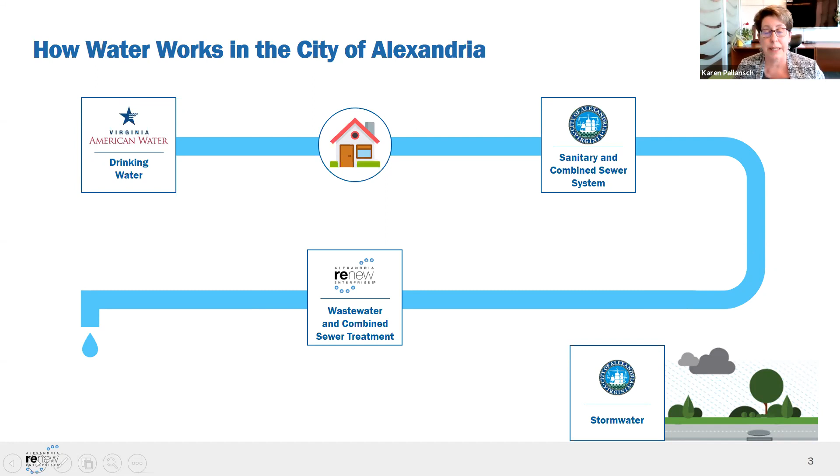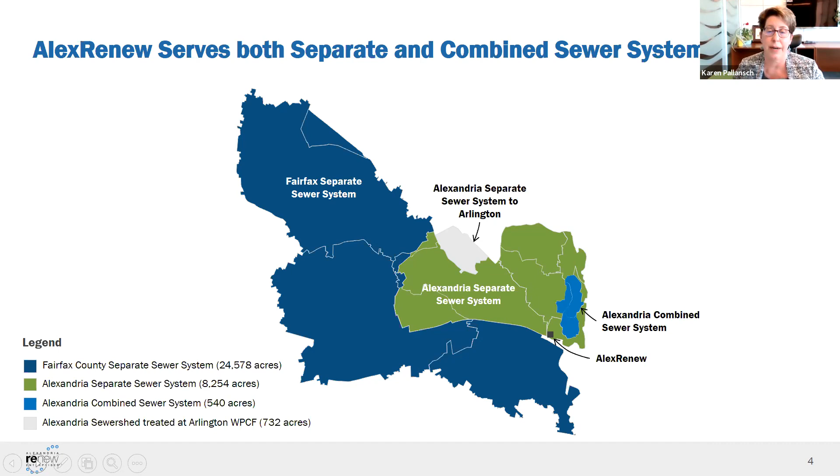I think we get really confused because we have a combined system that exists in the city of Alexandria.

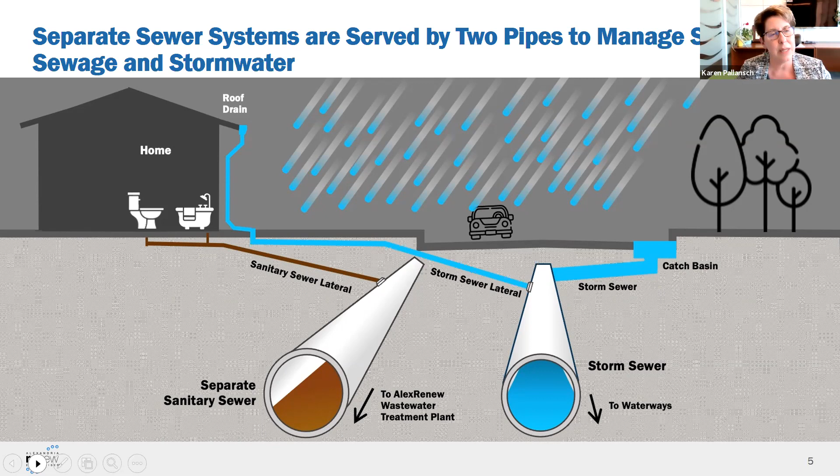And again, our permits only allow us to have the separate sanitary sewer going forward.

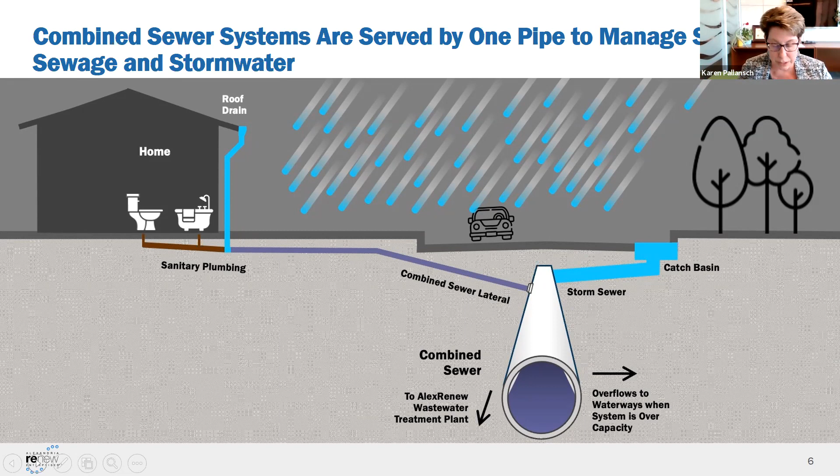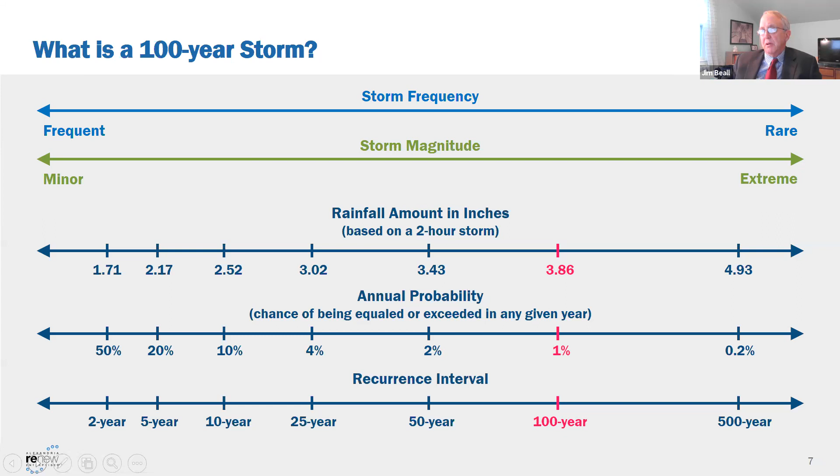And by the way, these curves are unique to this geographic area, right? I am not sure on that one, I would have to find out and get back to you. But yes, my understanding is they are - they're called intensity, duration, frequency curves, and they're different for every geographic place because rainfall is different. It is, yes.

Yes, 100%, excellent, very good. No, and thank you. When they showed me the graph, I said, oh, we can't show that. I can't even understand that, and I have to speak to it. So thanks to Mr. Carl and his team for acquiescing to my request to try to make this so I could understand it, because it's a challenging concept.

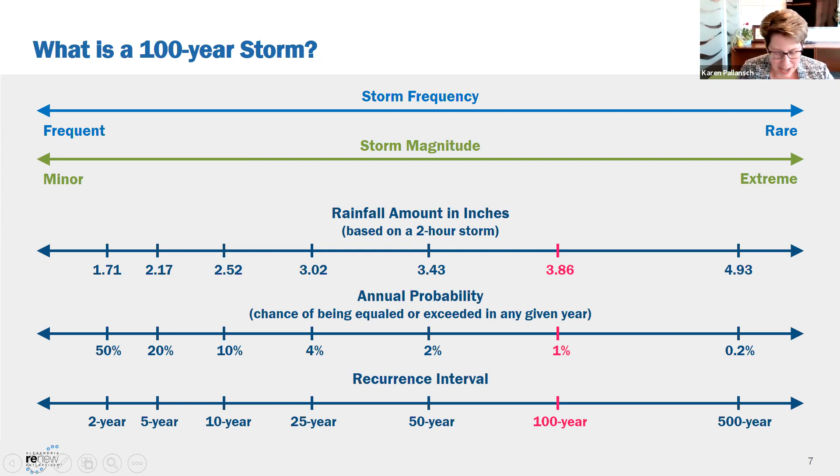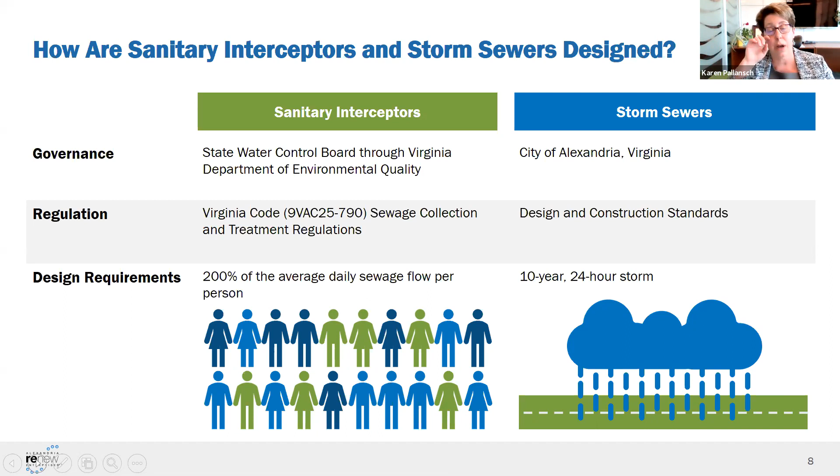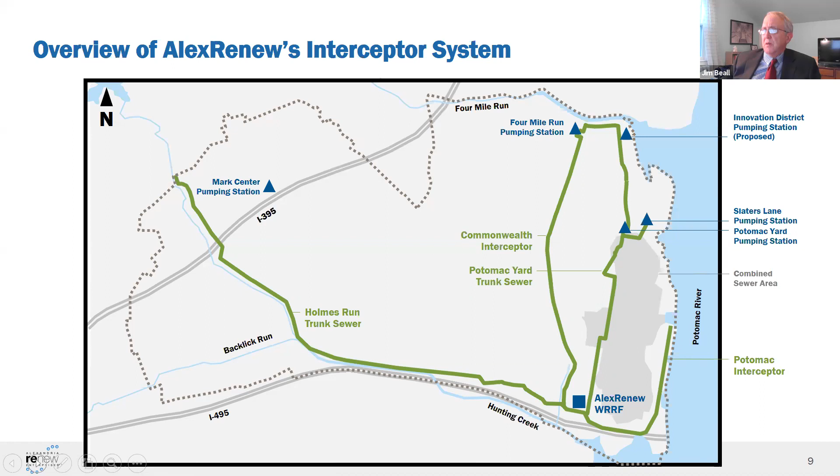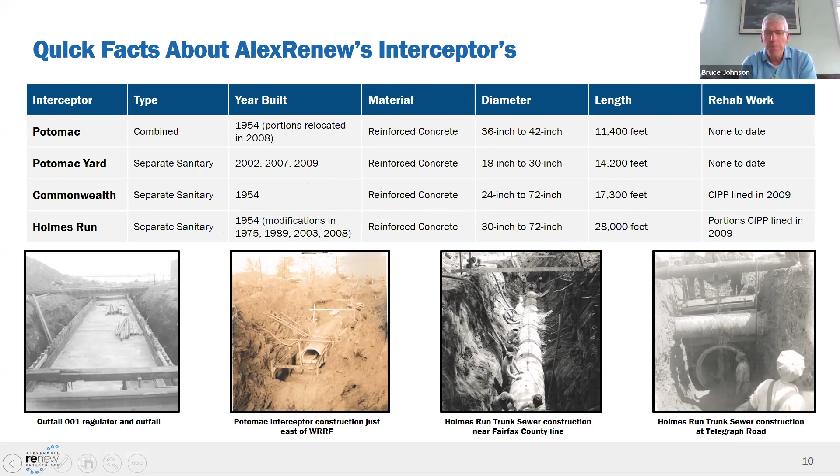Sorry, I missed the beginning of your question. Are pump stations designed to pump the water up over a ridge line, and then gravity flow takes it down to the plant? It's a ridge line, or there could be an obstacle—like the Potomac Yard pump station, which I believe we had to build because of the metro and the train there; we had to get the water up and under that and past it. So sometimes there are just obstacles that we have to move the water around.

Okay, I'll move on, and if there's continued questions, I'll take them.

This is really just an overview in more detail of what I just went through on the map slide. So remember, we have the 4 interceptors, but the Potomac is the one that is combined, skirting right at the Potomac River in Old Town. You can see it was one of the original ones. We've had to move pieces of it when they built the Woodrow Wilson Bridge—we relocated an entire section of that interceptor.

It gives you the materials, and there I did misspeak—it's 18 inches to 30 inches. I forgot about the Potomac Yard being smaller. But you can see the variety of sizes as those pipes go in and gradually increase.

Potomac Yard is the relatively new one, installed when they were starting to develop Potomac Yard. Commonwealth and Holmes Run are aged, along with the Potomac—they were built when the plant was originally built. Holmes Run had a lot of modifications because the metro went in, and a lot of development in the lower Eisenhower Valley caused a lot of relocations as well.

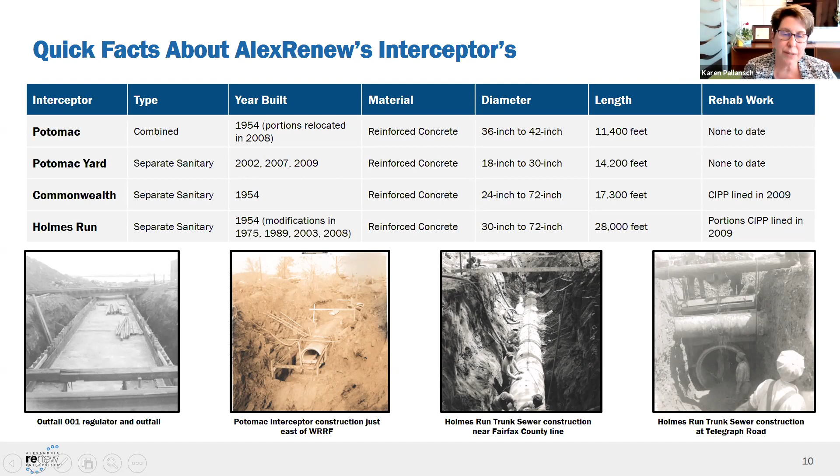There was a question, moving on to the next slide, about how do you know what your flows are? What do you do to measure that and make sure that they're running the way that they need to? Because of the agreements in place for monitoring, for the pump station and our existing operations, and especially for RiverRenew design, we've been working for many years to capture the data needed to know the flows.

On the left-hand side, you can see we have what we call mag meters, magnetic flow meters. They measure our pump station flows, what's going in and out of those pump stations. We have those located on all of our pump stations with feedback to the facility so we can monitor them. The other two are used pretty much together, and you can see how they're used in that schematic of the manhole and the interceptor over on the right-hand side.

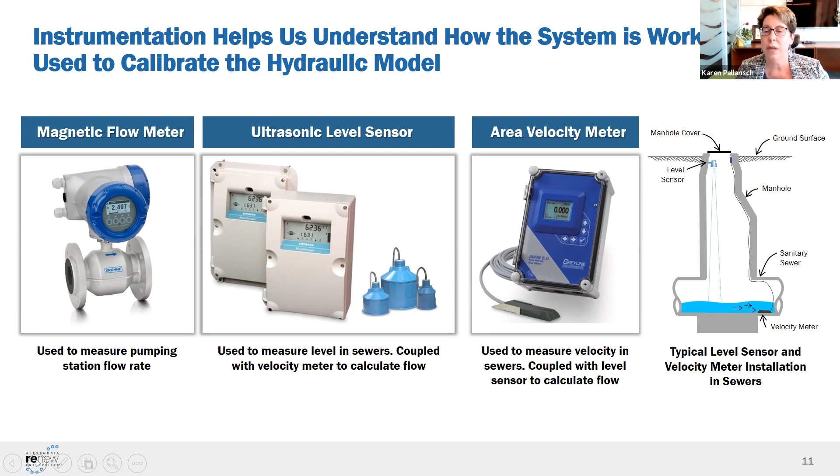It's a level sensor as well as a velocity meter. When you install them together, it gives you a sense of the volume and the amount of water that we have. So when you look at them together, going to the next slide, you can see that we have these installed in various locations.

Some are permanently installed. Any at the pump station are all permanent installations of flow meters. We do have a permanent level sensor up along the Commonwealth. There are some temporary flow meters installed basically at all the outfalls, 1, 2, 3, and 4, to help us as the design builder continues to refine his design. The other two along Holmes Run are permanent as well, as part of our monitoring system to help with the Fairfax agreements and the agreements we have in place for managing the flows coming in.

A question while we're on that slide, Karen. At the Mark Center, the pumping station that takes the line over to Arlington, who owns that line? The city? Okay, so we only have the pump.

We don't have the line. The federal government owns the pump station. We operate and maintain it based on a contract with the federal government. That pump station discharges into a collection system line owned by the city of Alexandria.

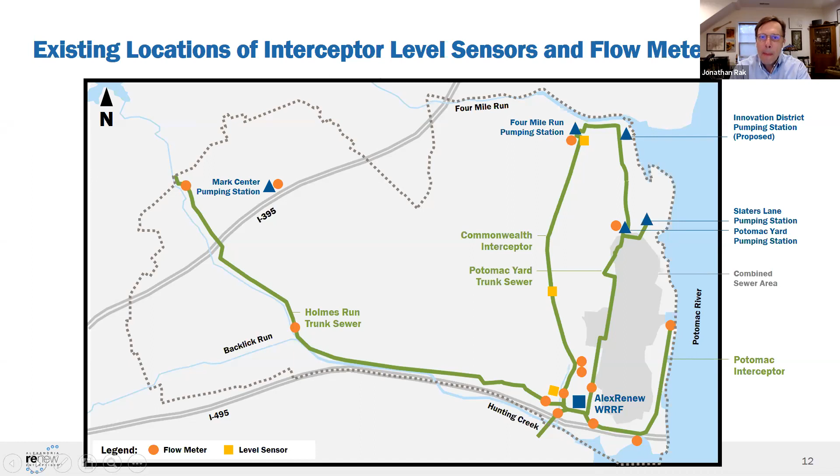Yes, in the agreement. Well, that also raises the question with all the development with Virginia Tech and the new tech center down in Potomac Yard. Has that all been factored into the load that we can carry?

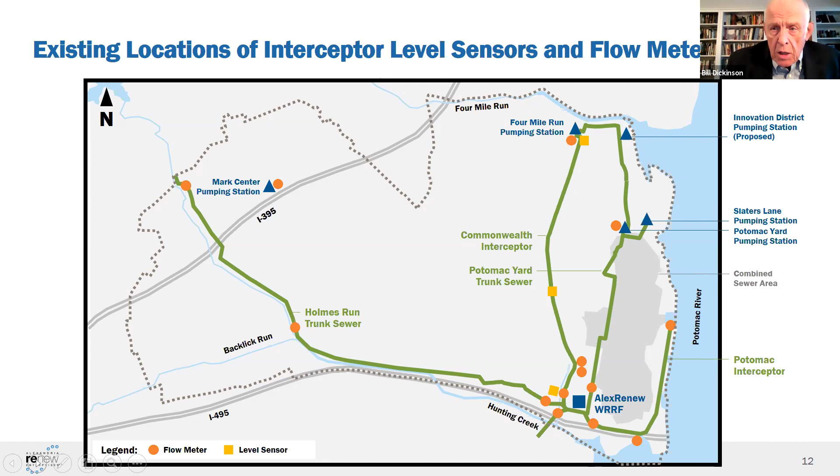So we continue to work with the city and have meetings with them about what their capacity is. If you remember, we signed a new service agreement that puts the design criteria into that service agreement for all of these lines, as well as for the facility, to make sure that they can maintain that 21.6 MGD capacity limit that they have right here at AlexRenew. And so as these development plans come up, we have those conversations with them. There's set meetings to go forward.

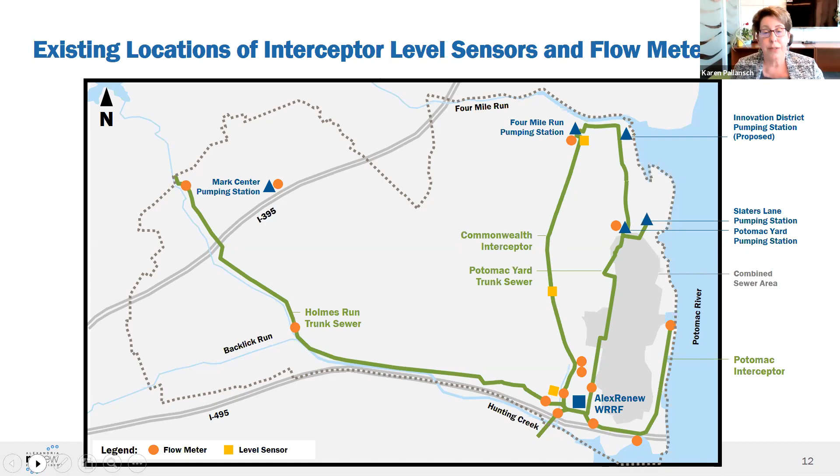So you heard me reference inflow and infiltration. What exactly is that, and why would you have to line a pipe to make that go away?

Let's start with infiltration because it's easier. It's really about how groundwater gets into your pipe. Sanitary sewer lines are not like water lines, they're not made to seal up tight, they're not watertight. Sometimes they'll crack, or tree limbs break into them, things like that. You also have joints, it's a bell and spigot, one fits into the other. Sometimes they'll shift or maybe the contractor didn't put them in very well.

That's the source where you can get water when the groundwater is high above that pipe, seeping into your pipe. What's important to remember is that 200%, or 2 times our design flow, the average daily flow per capita, already calculated in EPA, 10 state standards, the Virginia regs. They all acknowledge that a sanitary sewer is not going to be watertight. When you design it, you have design parameters to make that pipe big enough to carry these small amounts of inflow and infiltration that should come into your system. If you get more than that, you have to take steps to get that out of your system.

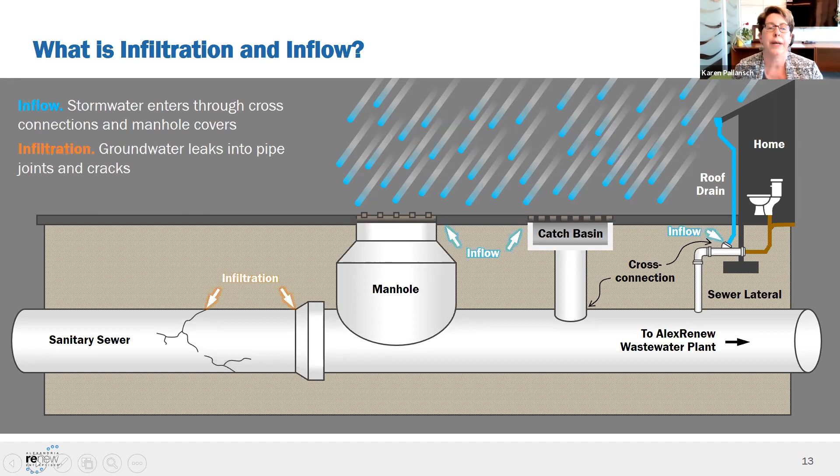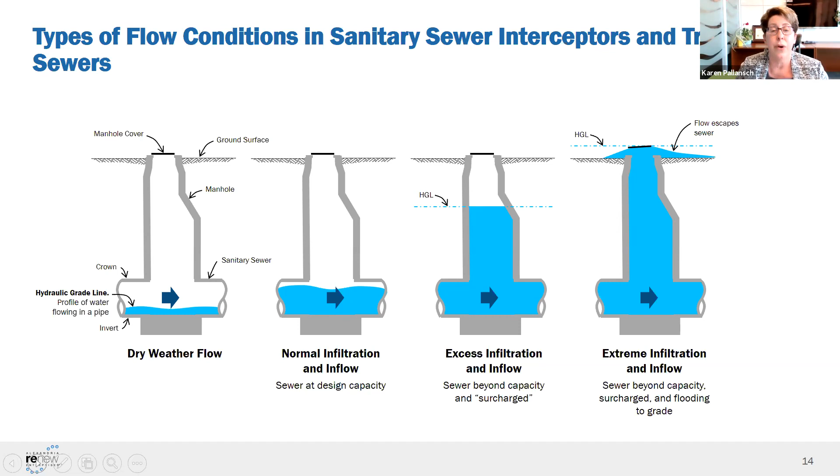On the next slide, we actually have a couple of things that we tried to do. We're required by our VPDES permit to make sure we don't have excessive I&I in our system, that we maintain our collection, our sewer system to be that separate sanitary sewer where it's designed to be.

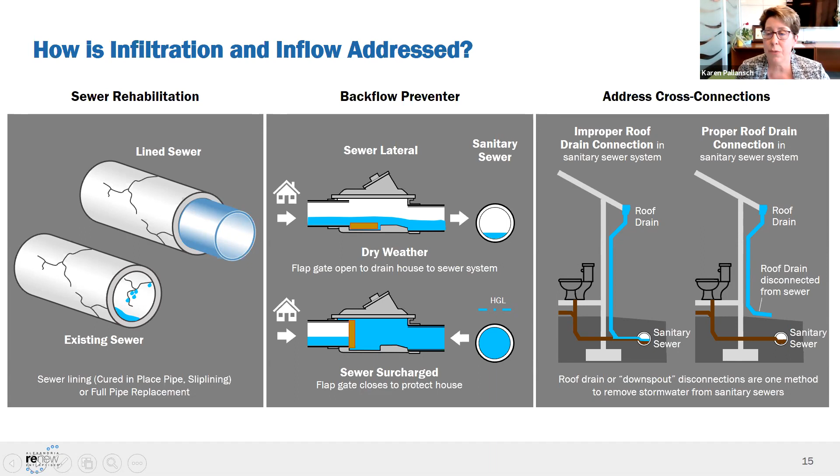I'm glad Erin brought up that they have some in Old Town in the combined area. I do know of combined sewer localities that use backflow preventers as well when they have too much stormwater going in. Some of the questions I received, not just from the community but also from one or two board members, had to do with what we're doing around Commonwealth Interceptor and what our role is when it comes to all the water going into people's basements. Because the community is very emotional and we tend to use the word sewer to mean everything, it reflects back on AlexRenew as, what are you doing about the sewer? So I wanted to walk through all of this and put it in context around the Commonwealth Interceptor.

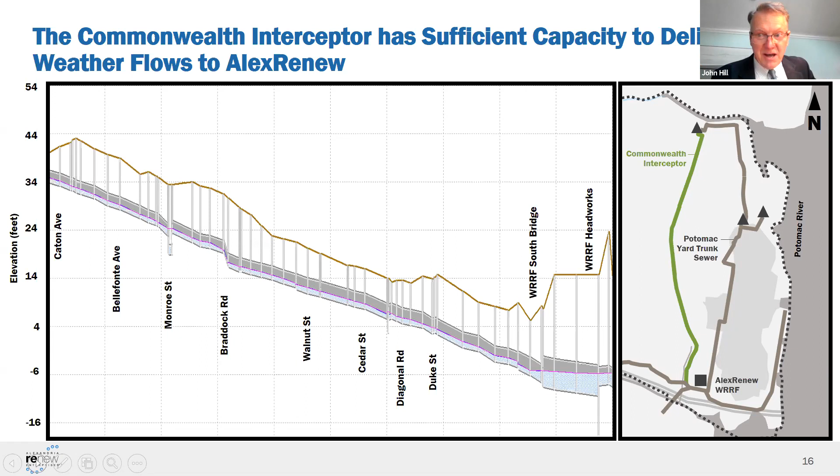So you guys good with the explanation? This is really good, whoever did this map, you've seen these before, you probably forget. I think we walked through these in like 2017 and 2018 when we were talking about AlexRenew and some of the flow studies and who does what. But that was a while ago, so I'm enjoying it now for the second time. I know I'm nerding out on you, but I appreciate your time, I think it's important to give you context. No, I live off Commonwealth, this is not theoretical for me at all. Right, this is the real deal.

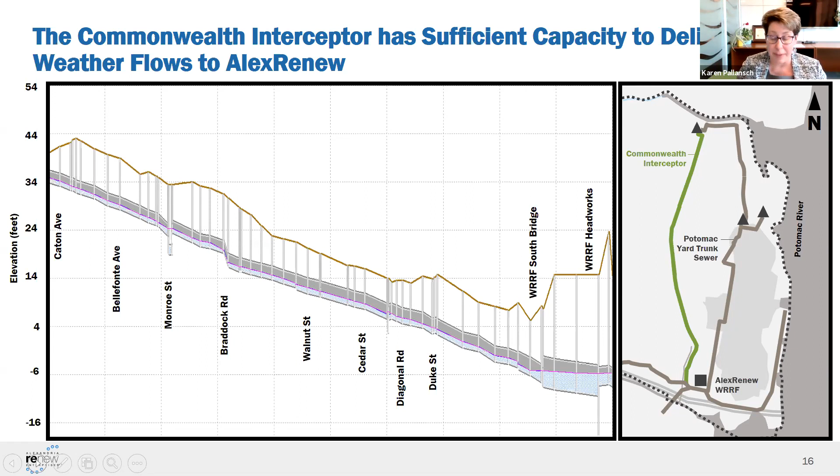So to your point, what happens in a storm event? What we did was we picked a storm, the July 8th, 2019 storm. That was the 50-year return storm. And we ran our models based on all that flow data from those pieces of equipment that I showed you earlier, and this is what we came up with.

You can see what happens. The hydraulic grade line went way up. What does that mean? Well, look at where's the gray pipe? It's not gray anymore. It's completely full of water. And it means that in those manholes, remember when I showed you the manholes that had the water going up and that hydraulic grade line was way high? That's what you're seeing with the blue line.

And in many areas from Walnut down to about King Street, there were actually conditions where the manholes were all the way at the top. That's what the little squiggly lines mean. They were either at the top or trying to escape out of those manholes. The one area where it was not that surcharged is where we still had up at the top where 4 Mile Run Pump Station is working into Caton Avenue. There's a little bit of a gap there. You can still see a bit of the gray pipe.

But during a storm event, what happens is too much stormwater gets into the Commonwealth interceptor. It causes that surcharge, and you remember I talked about what happens then. It's pressurizing the pipe and that water has to go somewhere. And so you have a health condition when you're pushing that stormwater back into basements or having it try to find another way to escape onto your roads.

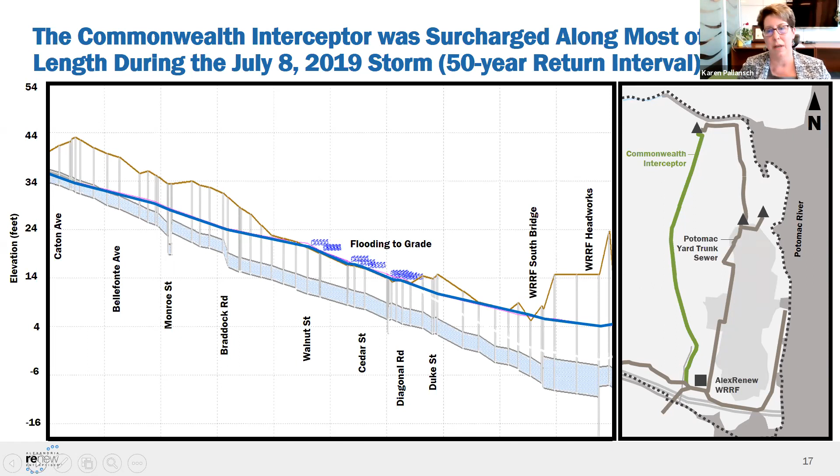I am not sure yet, but we continue to work with our colleagues there to make them aware of this. What I wanted to make you aware of is that at least the staff has done our job, and we've been getting a lot of comments from the public about sewer. Remember, I started this by saying we all need to start with the same terminology and vernacular - that's what we're getting to, to kind of walk you through that.

The other thing is the question or statement we always get - well, RiverRenew will take care of this. If you flip to the next slide, please remember RiverRenew is a water quality project. It is not a water quantity project. It is designed to remove or capture combined sewage. It's a health issue, a bacteria issue, and that's what we're doing at those 4 outfalls - capturing it and bringing that captured combined flow back to the facility.

So even with RiverRenew, the same storm event, when you model it after it's all done, at Duke Street where we pick up and had that new Hooff's Run interceptor, yes, we'll drop the line down, but you still have too much inflow and infiltration along the Commonwealth, lifting that hydraulic grade line that isn't removed by RiverRenew, because again, it's not designed to deal with that. This is a separate sanitary sewer.

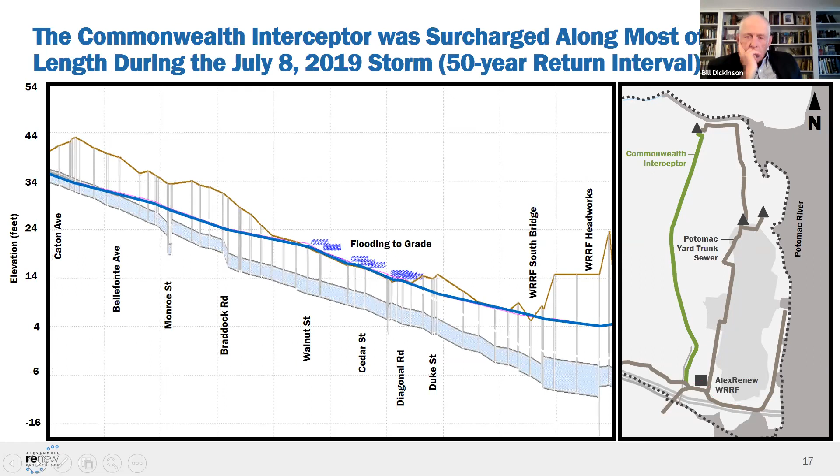RiverRenew - can you toggle back to the last slide and then back to this one, just to see the difference again? Okay, and I will send you the slide deck along with the slide deck from yesterday. Great. And so we wanted to put this...

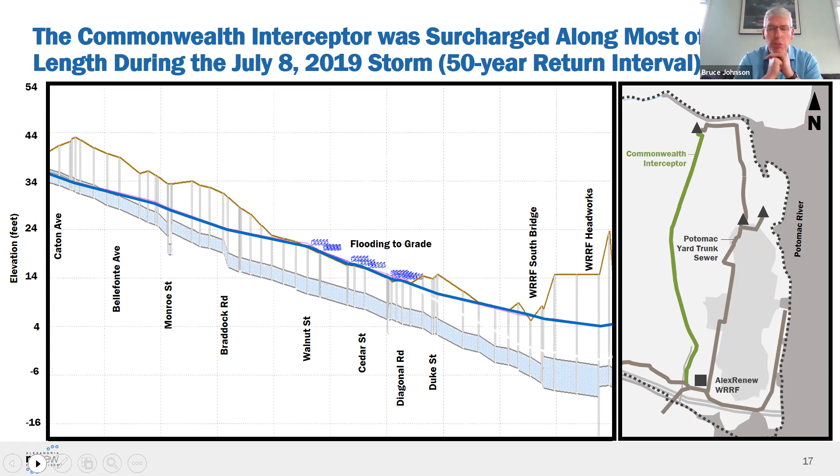Can I add something here, a historical perspective? When I first got involved in city stuff, it was 1996 to 2003. I was on BFAC, and in the last 3 years of my BFAC term, we did a lot of writing about the city's efforts to correct or improve the infiltration and inflow problem in the sanitary sewer system.

In fact, when I got to the city in 2003, we established a separate sanitary sewer fund within the city to help manage the finances for those improvements. But those improvements were mostly lining the sanitary sewers - the mains, not our interceptors that AlexRenew has, but sewer systems sort of go from smaller lines to bigger lines to bigger lines. The city went back throughout the entire city, but mostly in the older sections where they had a lot of cracks and infiltration, and put lining into those sanitary sewers.

The inflow problems, which Karen's diagram described, may not have all been solved at that point in time. It seemed to be more, in my memory, about fixing their sanitary sewers so that rainwater didn't leak in and then flow into our interceptors and overflow them. I say this because it's not like the city has not known about infiltration and inflow and the capacity problems of the sewers. Because of that problem, it's been 20 years that they've been working at it, not fast enough, not well enough to solve these problems in the last 5 years.

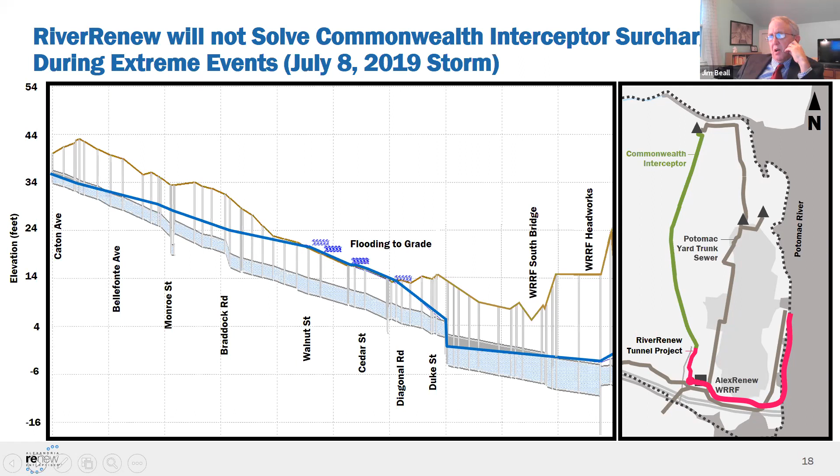So really effectively, in wet weather, the Commonwealth interceptor acts as a combined sewer. Yeah, if we flip to the next slide, I'm glad you picked that up. But these are charts that we put together about what it looks like in the storms or in our sanitary sewers when we have rain events.

So to your point, yes, it serves as a stormwater / combined sewer, which is not supposed to do. And so that is something that we are going to, we all know about it. We're going to continue to work with the city. I wanted you as the team and the spokespeople for AlexRenew to understand, we know this, we're working with the city.

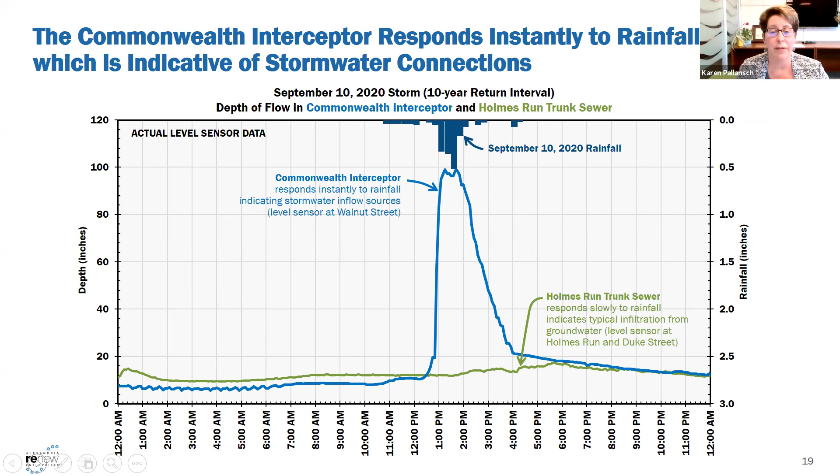Yeah, and I think your points are very valid. Sometimes I try things out on the board, and then we carry it forward to the stakeholder advisory group. So both this and nutrients are probably something we will share with them, because they have a role. The stakeholder advisory group are also supposed to be advocates in taking information out. It's just that we have to be thoughtful with the messaging as we go forward.

I'd like to offer one comment that, John, you're right. This is very complicated, and we've got three problems. The first is that this spike in rainfall drives flooding and drives sewer backups into people's basements. The second is that most of the water in the interceptor is still coming to the plant, and we're treating stormwater runoff, which we shouldn't be. But the third is that if you got rid of this, if you didn't have the flows into the interceptor, that water would still have to go somewhere else. And that's going to be a tough one to deal with.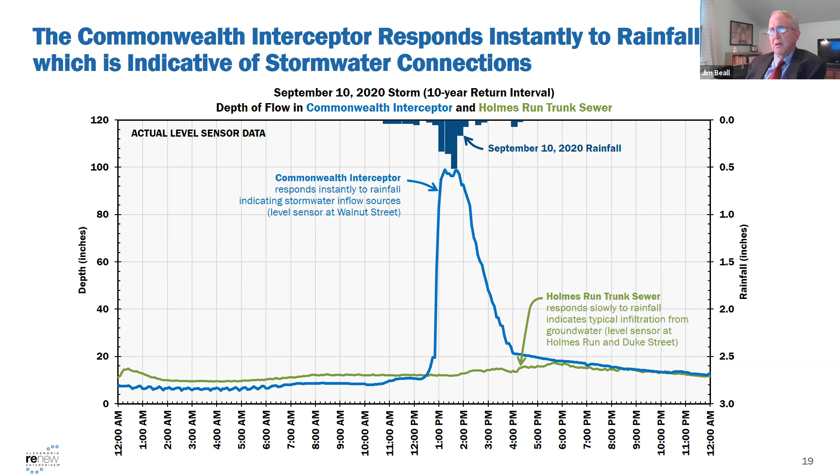Yeah, I mean, if your basement floods, it still floods, right? And whether the water comes from your downspout or comes up through your basement drain or toilet, it's still a flooded basement. And this is just a thorny problem.

But again, the only solution... oh geez... is infrastructure. Infrastructure, yeah. Always infrastructure, right? And keeping up with the infrastructure, right?

We have $1 billion in assets here at AlexRenew, and the board is wonderful at understanding our budget, working with the CFO and our financial staff to understand that we have to have a long-range plan. We look 10 or 15 years out, and to keep all this stuff working, we have to continually make investments. We can't just defer things. So this is kind of the takeaway from tonight.

What's the difference between a separate sanitary sewer, a separate storm sewer, and the combined sewer? They're each different. They each have different design parameters, and they're each designed to do different things. Our interceptors have capacity and are designed and do what they're supposed to do. Those three are separate sanitary interceptors, and there's one combined.

We have I&I in the system. We really need to make sure that there's a cross-connection program, a disconnect program, not just in the Commonwealth, but throughout the whole city. That makes sure the city has capacity at AlexRenew for future growth, for current growth, for what it needs, and that AlexRenew is getting separate sanitary sewer. We're doing our mission, which is human health, cleaning up the wastewater that comes to us.

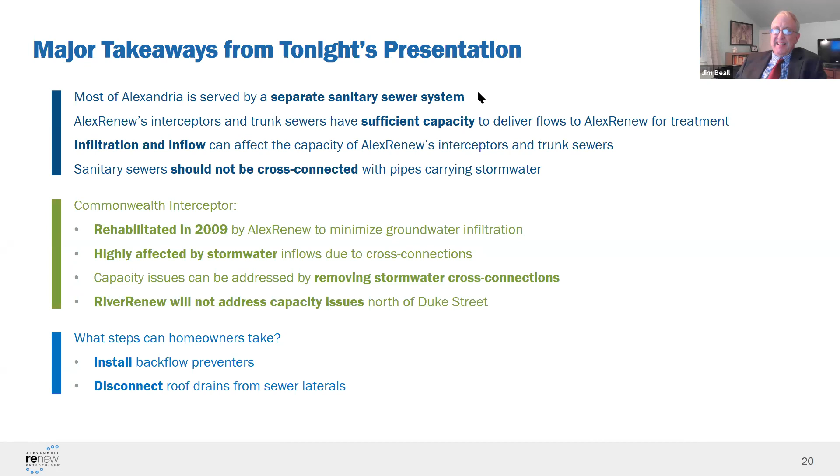The slide with the spike in runoff is the most frightening thing I've seen in years. That is one of the most brilliantly constructed graphs I've ever seen - and they're the normal graphs we use, and it's graphs like that help design AlexRenew. They helped inform both the city and the county and AlexRenew about what our issues are and what we needed to do to come up with the best solutions moving forward. Excellent work, excellent work.

Madam CEO, does that complete your update for today? That is the update. There were a couple more things - I've added some slides in just so you had them from some of the conversations we had. We still have, if there's any questions on the AlexRenew dashboard or the monthly financials, I'd be happy to try to answer those for you.

Are there questions from the board? They look pretty straightforward. We have all the easements in hand now. And Shahram and Aaron, do you have any questions? Good evening, Mr. Chairman - no, I don't have any questions, it was an excellent presentation, nicely done. Thank you, Shahram. Thank you, thank you - no questions for me either.